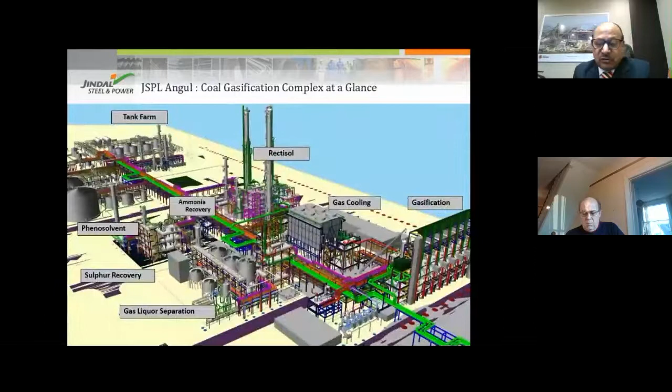So, rightly said by the Honorable Prime Minister - how can we utilize coal gasification through an environmentally friendly route?

You must be seeing a layout - it looks like a refinery. This is the plant we have in Angul, Odisha. I invite all of you, whosoever can, to visit our plant. It is running very well, 24/7. If somebody wants to visit this plant, it is a great technology demonstration as well as a learning experience. So one can visit.

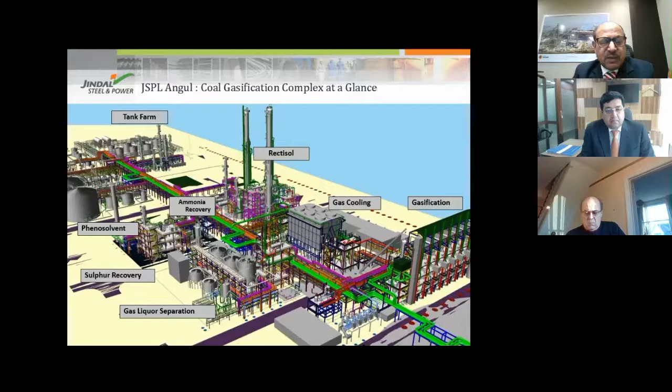If you see some of the areas, like for example on the right hand side you see the gasification block, then after gasification, the raw gas cooling. Then you see the two vertical columns - these are called Rectisol columns, where we reduce H2S, that is sulphur. Then it comes to ammonia recovery, where NH3 is recovered. Then we remove phenol, Phenosolvan, and also the gas liquor separation. So this is the simple layout, but the equipment is very complex, and you have to maintain it very well to reach the right quality of gas.

This is the process normally people worldwide adapt to produce DRI. In DRI, this is called MIDREX shaft DRI. A similar DRI shaft process is from HYL, that is Mexico. They are the two large suppliers. So what we do is feed the syngas into the vertical shaft furnace.

From the top, the iron oxide pellets come down. It is like a cupola or blast furnace or any other converter. The gas goes from the bottom, and the iron ore pellets come from the top. Though I'm telling it very simply, it is not so simple.

Then there is a top gas recovery. It goes through a scrubber, then finally the CO2 is removed, and then it is recycled again. It goes to the gas heater and again goes to the vertical shaft kiln. This is a chain process.

On the left hand side, we produce coal to gas, then a gas cleaning system, also hydrogen sulfide removal, H2S removal system, and then there is a turbo expander, because the gas coming from the gasifiers is at a pressure of 22 bar, and we need only 2 bar in the kiln. So we have put up a turbo expander, or you can say a power generation system. This is where we generate power, and this power is sufficient to meet the requirement of the DRI plant.

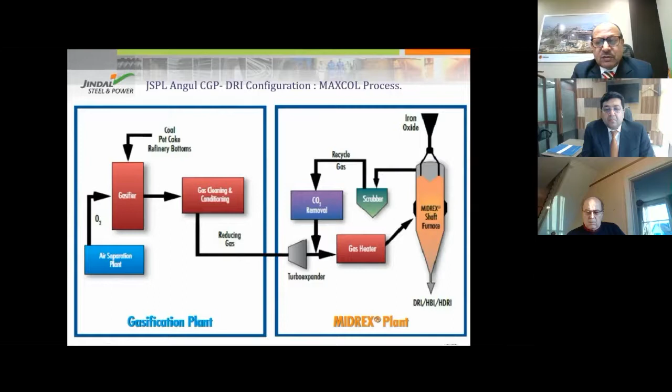That was the layout, and this is the real picture at night. How does a gasification unit look? If you see, these two vertical towers are the rectisol towers, and the small tower is a methanol charging unit, and the left hand side tower is the ammonia recovery tower.

Then you are seeing 6 big tanks. This is called the tank farm, for various byproducts. And finally on the left hand side, you see the big gas pipeline coming. This gas pipeline is going to our DRI plant.

It is online - there is no storage or reservoir in between for the gas, because the gas is at 22 bar pressure. We need a continuous flow of gas to the plant, and it cannot be stored in between. The consumption is pretty high - we are nowadays consuming about 120,000 nm³ per hour, and for the balance we are utilizing our coke oven gas.

There is also another view of the gasifiers. You will see the front side is the gasification unit, and on the right hand side the cleaning units. This is how it looks - very clean, very green. There is no smoke, nothing. You won't find any smell, or any SOx or NOx in the area. So whether you gasify above the surface or under the surface, the environment is fully taken care of.

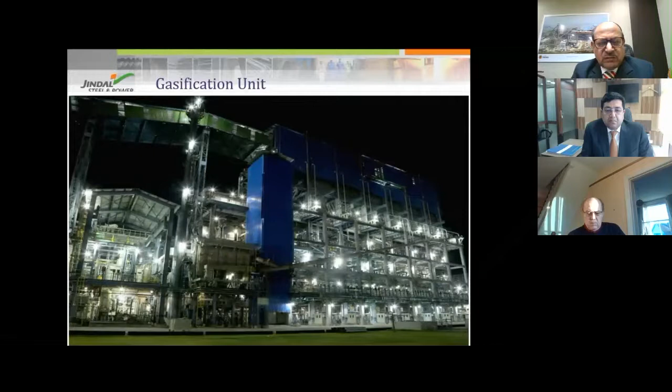These are the 7 gasifiers. If you see on the right hand side, there is a blue vertical panel, and on the right side there are 7 gasifiers. We normally run 5 gasifiers, and 2 gasifiers are kept in hot standby condition. Suppose there is some breakdown, or some ash is locked into it, or some conveyor is creating a problem, then immediately we switch over. During the cooling process, we also produce steam from these gasifiers.

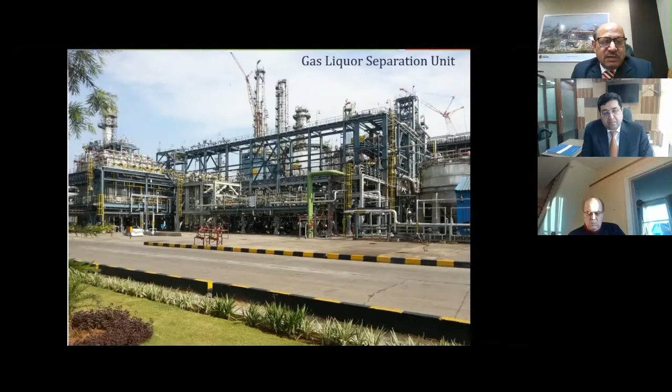This is a gas cooling unit you are seeing on the left hand side, and just at 90 degrees to us is the ammonia recovery plant. This is another view, showing again 2 rectisol vertical columns, and the left hand side is the ammonia recovery plant. Again, the rectisol unit - we are showing a closer view so that you know how this plant looks. It's just not burning coal somewhere and then producing syngas.

There is a difference between producing producer gas versus syngas. As I told you, we also started making some producer gas, and that was not a good experience - that was in another plant in Odisha. But here it is a success story, and it is like a refinery, I would say.

This is the Phenosolvan Plant unit. If you see the floor area, you will not find any spillover of chemicals, dust, coal dust or particles. It is as clean as a good street or a good house.

That's why I was telling that whosoever wants to visit, I'm extending an open invitation on behalf of Mr. Jindal, our chairman, on behalf of our company, and on my behalf.

We believe in dissemination of knowledge, and we expect more plants will come in this country. As the Honorable Prime Minister was saying, we are interested in coal gasification units. We have already done it, I would say 6 years back. We conceived it about 13 years back. The Prime Minister has given the thrust now in 2019, but we were already in operation since 2014.

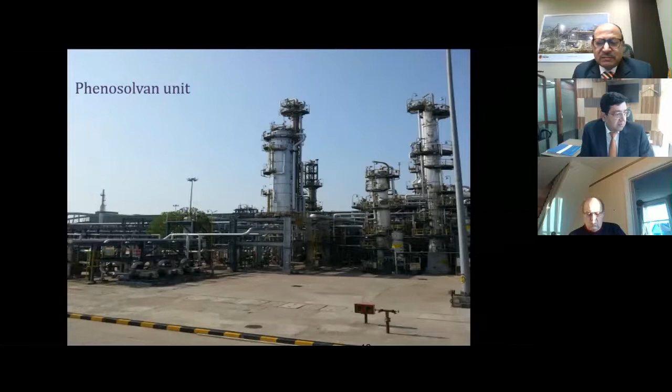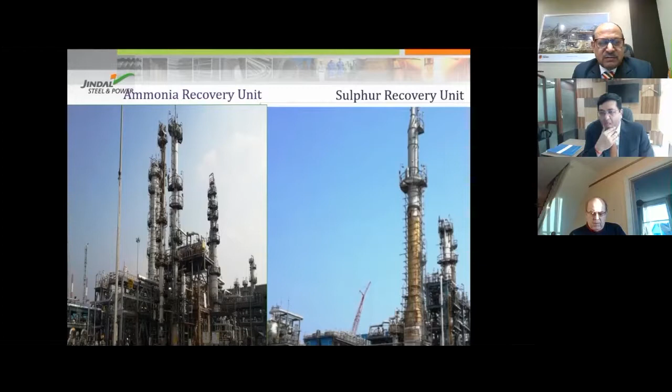The ammonia recovery column you are seeing, and the sulfur recovery unit you are seeing on the right hand side, where we take out the purest form of sulfur, which we sell in the market, and ammonia also we sell in the market as liquid ammonia.

These are some slides which will help you understand what this gasification means for India. The clean energy technology to harness our huge high-ash coal reserves is a must, as highlighted by Honorable Prime Minister Mr. Modi, and this will make India Atmanirbhar for sure, because this is import substitution.

Basically, we do not need to import crude oil. If we convert at least 300 million or 400 million tonnes of coal every year, we can meet at least 40 to 50% of the country's demand in terms of energy, whether it is SNG, coal to methanol, coal to liquid that is HSD, or coal to petrol, benzene.

Coal can also be converted to the last product of polyesters, that is olefins, which can also be produced very well. Basically, all the refineries in India should be asked by Government of India that at least 25% of their product should come from coal, through the coal gasification route. That will definitely help the nation become self-reliant in terms of energy requirement.

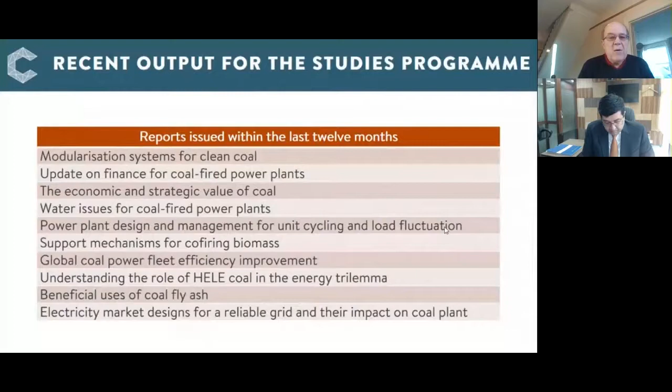We've been looking at the modularization systems for clean coal. That's really been part of the Coal First program in the USA. We have looked at water issues for coal-fired power plants—a very important issue, I feel. And we've also been looking at power plant design and management for unit cycling and load fluctuation, where you have to balance the intermittency of variable renewable energy sources like solar and wind with reliable, robust, dispatchable power that you can get from coal, gas, biomass, and hydro.

This is quite a new but fast-growing area. You can take low-grade coal and convert it into higher-grade carbon products and non-energy carbon products like graphene or carbon fibers. Also from certain coals, you can extract rare earth elements, which are a strategic imperative for all countries, because rare earth elements now appear in your mobile phone and a lot of other communication devices. And the natural resources for these are mostly very limited. Rare earth, it is rare.

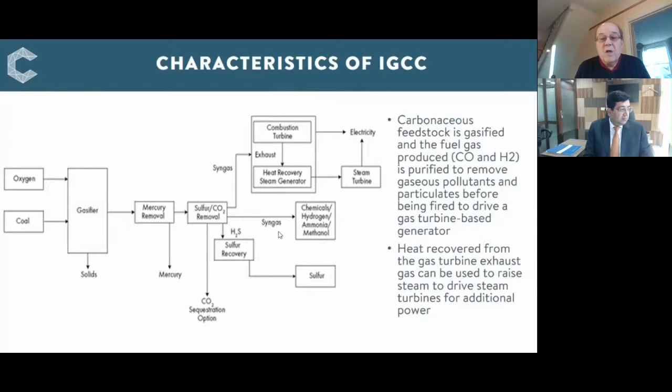It's a relatively complex system, and a very high capital cost system, but it does have the advantage of readily enabling you to clean the gas. If you're looking into the future for perhaps carbon dioxide emission removal, this is going to be probably an easier system than the one starting to be applied on coal-fired power plants with combustion-based processes.

It also offers the opportunity to shift the composition of syngas, remove the CO2 from the gas stream, and produce high-value hydrogen that can be used to drive a fuel cell or be used in the manufacture of certain products.

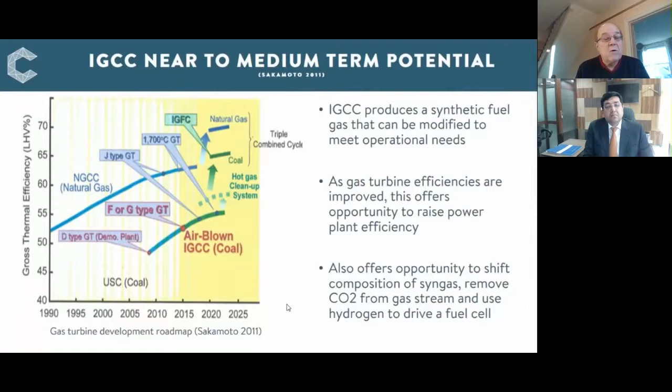You can either fire it dry or as a slurry feed. But then there are alternative systems designed to take different types of coal. A moving bed gasifier, for example, takes lump coal, but only lump coal, not fine coal. A fluidized bed gasifier is very simple, but it's less efficient than the other three examples.

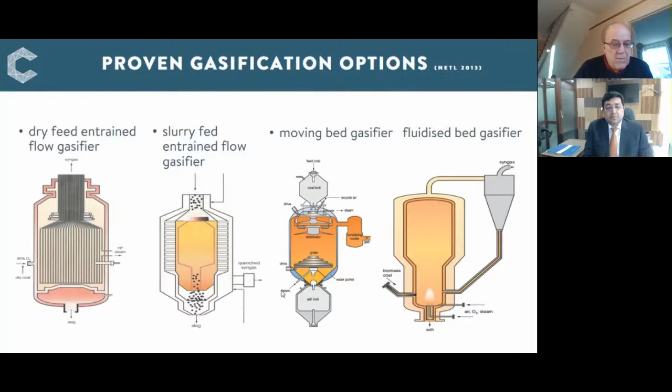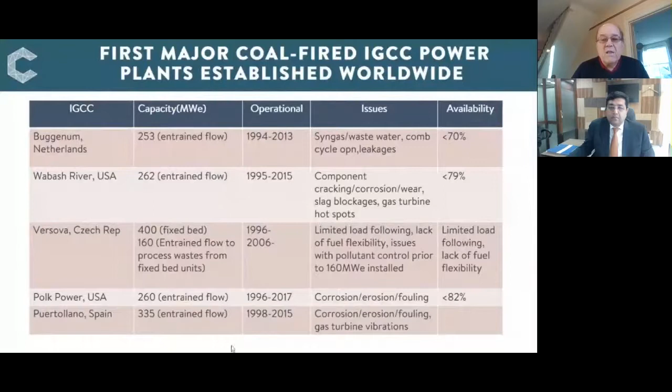This shows the capacities, the operational times, and the issues that occurred. For the interest of time, I'm not going to spend time taking you through that. You could look that through at your leisure, but I will highlight some of the key findings from these various existing projects. The first projects are always going to be more difficult, but there were certain ways that some of these plants were constructed that perhaps lost focus.

The design and integration approaches and the rather inadequate operational procedures led to poor operation. The fundamental problem with those early plants was the availability was probably at best around 70%, which is not high enough. The other key point is these units were designed to maximize efficiency, so there's very close integration of the air separation units, the gas turbines and the gasifier. But the more efficient that plant came, the tighter the integration, and that meant operational availability was very vulnerable to any outages from any one of these systems, causing significant knock-on effects.

Surprisingly, also, the performance of some of the components were very susceptible to changes in quality and composition of the coal types that were tested. And some individual pieces of equipment just didn't scale up very well, so they didn't follow the predictions based on small-scale results.

Nevertheless, demonstration plants are built for a reason, because it helps you to find the problems. It can be a very expensive reason - this was an expensive learning process. But there was a lot of learning by doing, and that's been fed into the subsequent projects and achieved a rather different picture. So let's move on to the later projects.

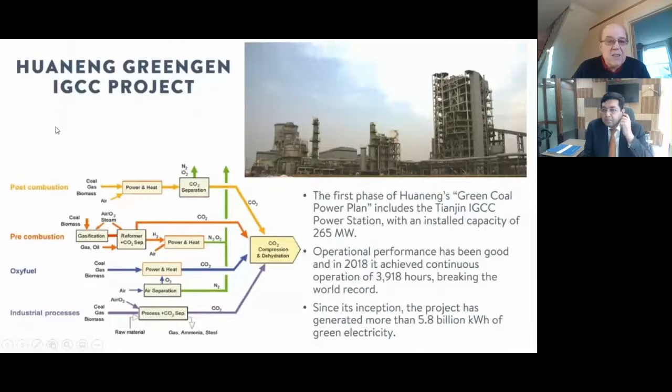Its goal was, and has been achieved, to develop a Japanese-built oxygen-blown entrained flow coal gasifier suitable for multi-purpose applications. This was a 150 ton per day pilot plant, with many options, and has performed very well. I'll come back to that a little later, but you can see here it included the generation of electric power. There was also the production of synthetic fuels, chemicals and hydrogen, and it's also considered polygeneration aspects.

And particularly with the hydrogen, they're looking there for using it to produce very clean energy via fuel cell applications for the future.

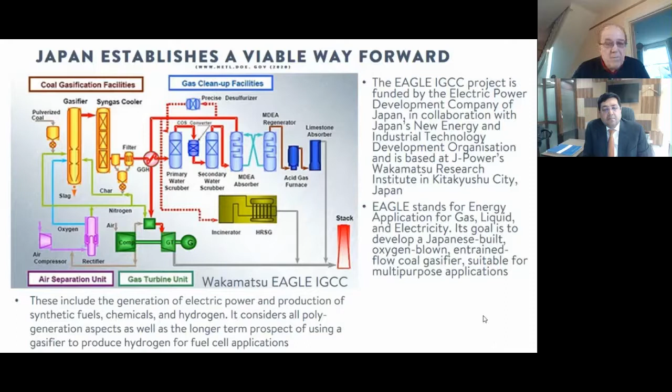The next phase looked at multiple utilization options and diversification, trying different coal types, and looking at capture of CO2 from the coal gas stream through chemical absorption, as well as trace element behavior. The third stage looked at different approaches to carbon dioxide capture, trialing various advanced developments.

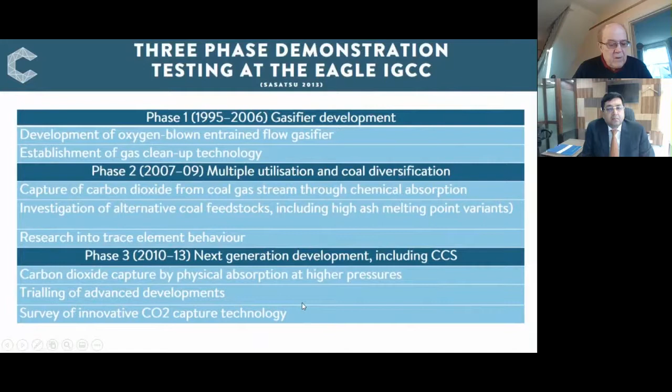It's proved very successful, and we can talk more about where that's going. I also want to highlight the Nakoso air-blown IGCC. Actually, it was oxygen-enriched air-blown. Essentially this was a 250 megawatt demonstration plant.

It ran for more than 16,000 hours and then went into commercial operation at the Joban Joint Power Company. It achieved 42% efficiency, and you might rightly say that's quite low, but it was achieved with a 1200 degrees Celsius D-class turbine, an old-fashioned gas turbine.

Mitsubishi Power Systems suggests that with a bigger gasification unit, a 480 megawatt net plant, you could achieve about 48% with a higher efficiency G-class turbine. And with a 580 megawatt plant, you could achieve about 50% efficiency with a state-of-the-art J-class machine.

On the back of that program, Tokyo Electric Power is currently building two new IGCC plants in Fukushima Prefecture, each of 540 megawatts individual capacity.

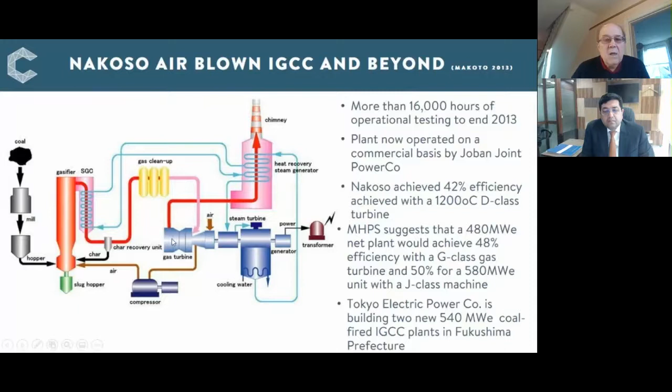This slide shows the actual Nakoso plant, now part of the Joban Power Company, and it's a good example of a demonstration going through directly to actual deployment.

Coming back to the oxygen-blown variant, based on the Eagle project, they have a plan for the Osaki CoolGen project, where the intention is to scale up from their small unit. Again, you can remove CO2 if you shift the syngas reactions over a catalyst.

You get a CO2 piece you can remove, and hydrogen can run the fuel cell. The CO2 can be taken away either for utilization or potential storage in a geological formation.

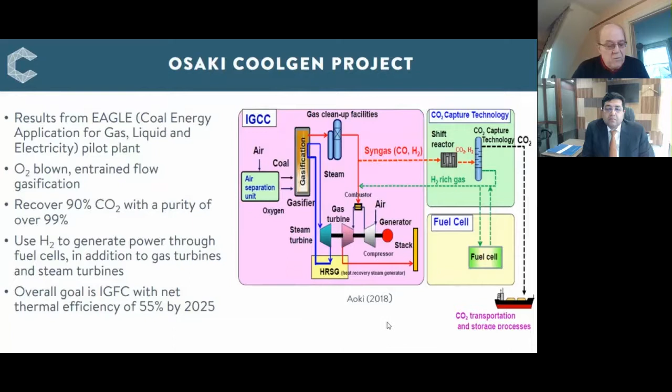I mentioned Japan is taking forward fuel cells. They see this as a very important area for moving towards zero emission, high efficiency coal power plants. But it's fair to say there's still some way to go, particularly in the scale-up activities.

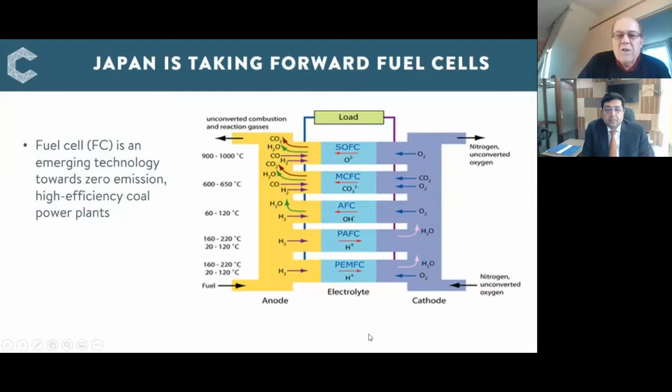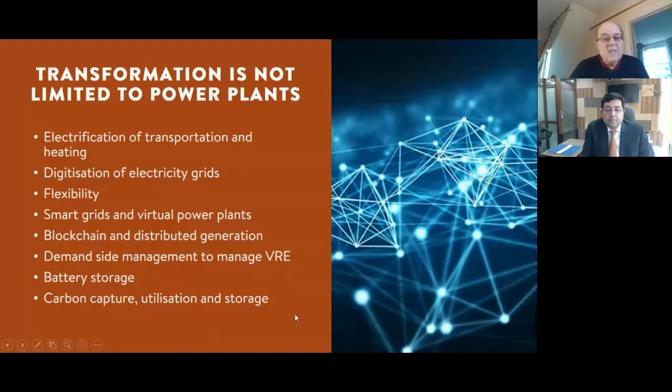I'd like to say a little bit about producing future fuels and chemicals from coal gasification, as that is another option.

This is a simple slide. It shows low-grade coal on the left, which you can gasify. You can then adjust your chemical mix, and you can either produce power, or more especially in this context, produce a very wide range of required products for use in the industrial and commercial sectors.

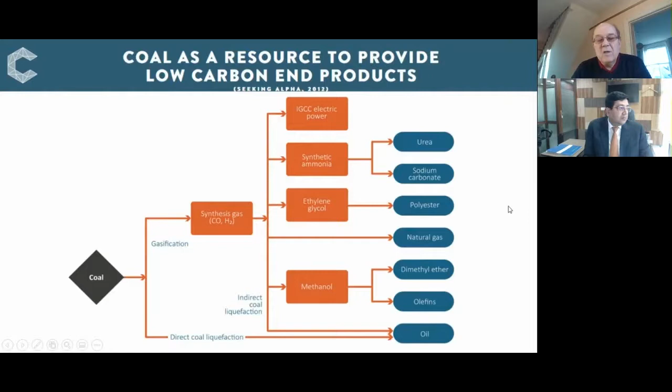That looks great, and the coal is low cost, low grade, but the capital cost of these systems is very high because of the complexity needed to make all these potential products. That's an issue that has to be taken into account. In some cases, it's going to be a finely balanced decision to take this forward in certain parts of the world.

This program was established by the Chinese state government. The first building block they made was ammonia, then fertilizer, then hydrogen, then methanol, and then they moved into more complex chemicals and also coal to synfuels, synthetic oils.

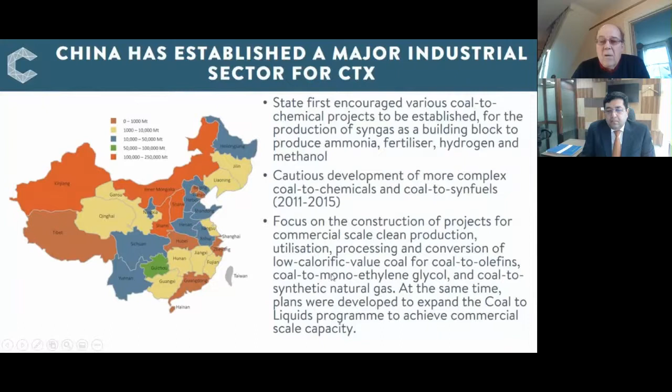They've also, and I've listed other compounds here. Two notable highlights from China Energy, which is a major technology developer.

In 2009, they established a 1 million ton per year product output from a direct coal to liquid fuels process. And in 2017, they produced a 2 million ton per year plant based on the indirect coal to liquids process, essentially the gasification systems I've been showing you in the previous slides.

These are both very good plants, and much of the time they're very profitable. But these systems are vulnerable to low-cost alternatives such as oil and gas. You can make these products from coal, yes, but you can also make them from oil or gas. And right now, for example, oil and gas prices are very low in much of the world, and I suspect the output from these plants is not much more than ticking over to keep them running.

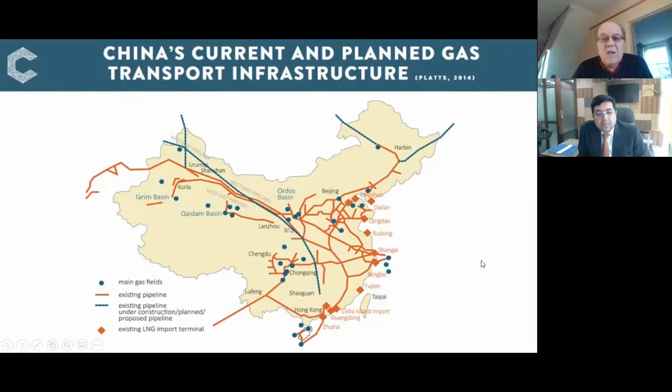We heard already the excellent work going on at the JSPL Angul plant. There is also coal to methanol activity, I believe, in India.

I just want to highlight very quickly a project in Australia-Japan cooperation. Australia has massive amounts of very low-grade brown coal - I would personally argue it's not coal, it's fossilized wood. You can gasify that, though, to make high-grade hydrogen, which can be pressurized, contained, and shipped back to Japan. And the CO2 removed from the process can be stored in geological formations in Australia.

There's a lot of work going on to establish a primary demonstration project of that, and I'll be very interested to see how the results come out from that in the future.

Just bringing that part to an end, before I cover one other topic, I think the case for coal is very strong. It will need to remain an integral part of the global energy supply for a long-term sustainable future for the world. But at the same time, we've got to keep looking at ways to best improve the efficiency of operation and ensure we get a sound environmental footprint from the various processes.

Right, my last few slides. What I'm very pleased to introduce you to is the IEA Clean Coal Centre's Knowledge Partners Network.

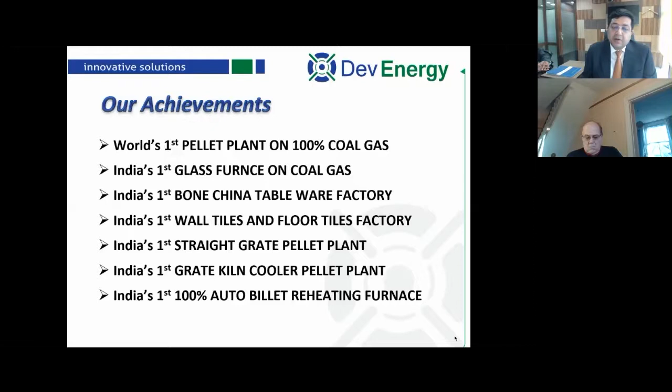These are some of our achievements. We have been India's number one in terms of gasification for glass furnaces, bone china, wall tiles, floor tiles, and pellet plants, iron ore fines converted into pellets, both straight grate and rotary kiln. We have been the first in India to install gasification systems across all these technologies to convert their existing fuels into coal gas.

What is our technology? The core of our technology is two-stage gasification. This is a fixed bed updraft gasification system which converts coal by gasification in 2 stages. Stage 1 is the up stage, where it takes out the volatile matter of the coal, and the second stage converts the coal carbon into CO, methane, and hydrogen, a mixture of these 3 gases. The calorific value of both these gases are different.

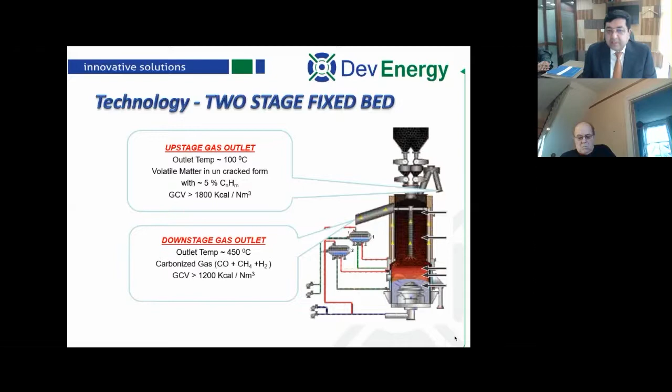Also, the temperatures are different, compositions are different, and therefore both these gases are processed through different cooling and cleaning trains, as you can see in the process flow. This is slightly complex because the up-stage gases are taken through electrostatic precipitators and then indirect coolers, then again a train of secondary electrostatic precipitators. The down-stage gas is cooled through multiple stages of cooling and cleaning. Finally, all these gases are mixed, and desulfurization is done on them, then they are boosted by pressure boosters to meet the pressure required in the lines.

Now, these systems are air fed. The air and steam, which is generated within the system, is fed as the gasification agent. This system is a complete island mode, and no external steam is required to run it.

We have around 180 of these systems running in India, and the oldest one has been running for 15 years. The latest one we did in a pellet plant is operating at almost 87-88% conversion efficiency from coal to gas and tar.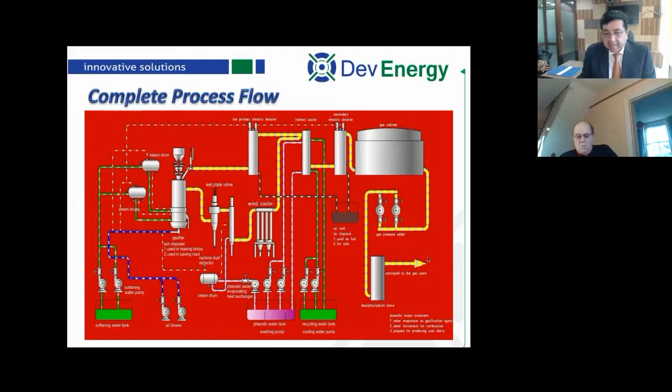This is a broad energy balance for the gasifier system. As you can see, we can almost convert 78% into final coal gas and around 9% into tar. This is assuming 5500 calorie coal. Even for the worst coals, like F grade or G grade coals, this total number remains in the range of 75%, both for gas and tar combined.